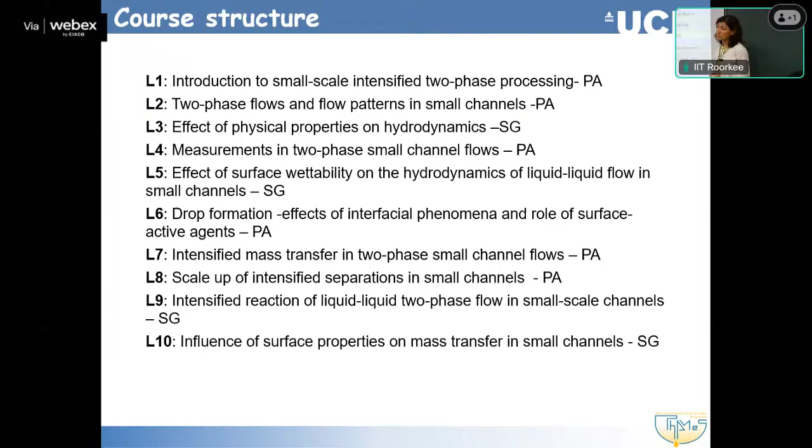So a few things before we continue and how these things were all brought together. I am from UCL. I don't know if people have been to the UK. UCL, I have a map as well, is located very centrally. It was founded in 1826, and in 2 years' time, we are going to have our 200 years anniversary. It was the first to admit students regardless of class, race, or religion.

In the old days, we had the big universities, Oxford, Cambridge, and some others in the north, that were all based on religious admissions. And it was the first to admit women students on equal terms with men. And it offered the systematic teaching of medicine, law, and engineering in England.

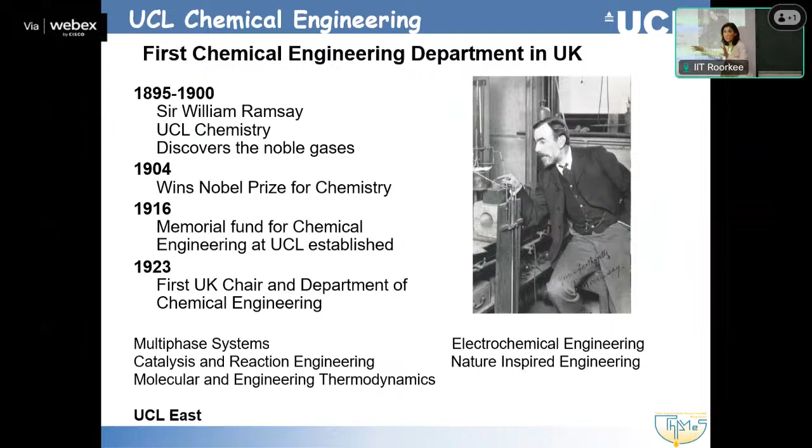So there was this memorial fund to create a chair of chemical engineering, but also a department later on of chemical engineering. And now in the department we have these research areas: multi-phase systems, catalysis and reaction engineering, molecular and engineering thermodynamics, electrochemical engineering that does a lot of work on fuel cells and batteries, and nature-inspired engineering. Multi-phase systems is where my research area belongs.

Just to give you an idea of the size of the department, we have about 555 undergraduate students, 122 MSc students, about 200 PhD students and research fellows, PDRAs. And at the moment, we have 33 academic staff and 18 lecturers teaching. So within this multi-phase research area, and now I'm coming more into what we are going to discuss today, is where my research group sits.

The work we do in my research group looks at different scales, traditionally starting from larger-scale two-phase flows, originating from the old energy, oil and gas applications, moving to medium and to small scale, which is linked to intensification. The connection between all these scales is the interfacial phenomena. We are studying mainly liquid-liquid flows, and the effect of the interfacial phenomena is very important. Small scales help us understand interactions, but can also be applied to large-scale flows.

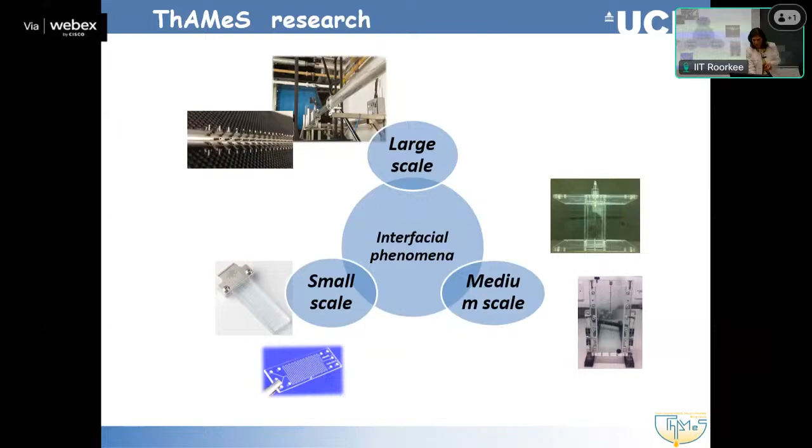So if I go now to my first lecture, it's called Introduction to Small-Scale Intensified Processing. And I decided to talk a little bit first about process intensification.

I don't know if I can move that. Yeah, I can put it here.

Hide it. Okay. Right. So why are we talking about process intensification in small scales? First of all, where did microscale come from? I have a little bit of a history here.

So in the late 60s, silicon wafers started developing, and not just that, but we started having the integration of sensors into wafers, and that created what we call microelectromechanical systems, the MEMS. These exist and are widely used today. We can find them in cars, in printers, in biomedical devices. The whole concept then continued into applications to chemistry.

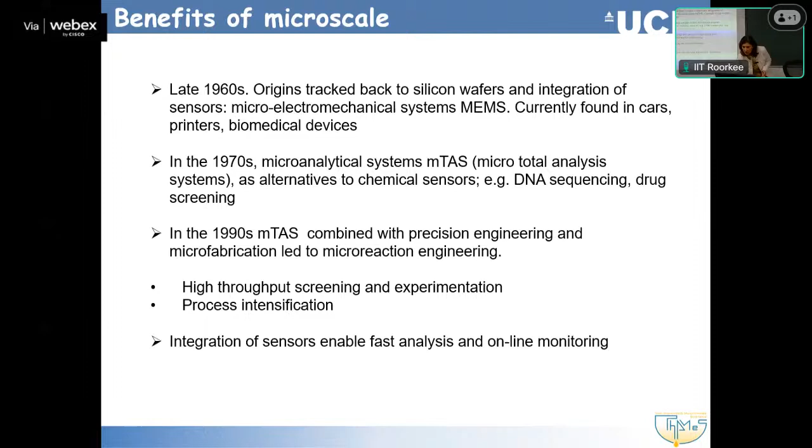So, let me see. What are the benefits? This was the history of these microscale applications, let's say. What are the benefits though? And I think if people have been working in this area, I don't know if I should try to have that a bit more interactive.

Why do we want, I don't know if anybody in the room, I know some people are working. What do you think are the benefits? Why do we want to do operations or processes in small scales? I have some here, but why did you decide to work with these small scales? Yeah. Probably efficiency is much better at that level. Yeah, efficiency is a step further. What is better efficiency?

Sorry? High surface volume ratio. High surface area to volume ratios? Anything else? Good, particles undergo the same kind of treatment. That's good, yeah. That's a nice one. Anybody else? All of the above. Okay, there are a lot of benefits.

We are working in small scales, so the fluid films are thin, which means heat and mass transfer rates will be faster. They don't have to go through a lot of fluid. The films are thin. There is a disadvantage on that. We can discuss that later. Thin fluid films, enhanced heat and mass transfer rates means that we reduce the concentration and temperature gradients. The conditions are more uniform.

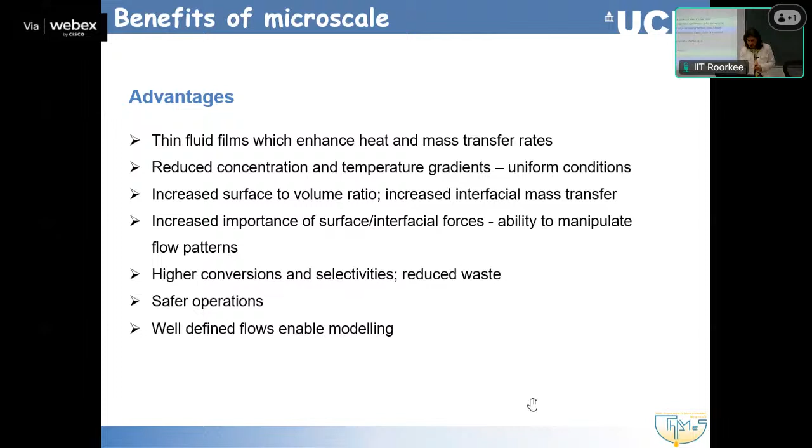Let me go now to this definition of microscale, with some equations. So what is small? We say micro, small channels, but what is actually small? It's a little bit of a vague concept. So the main way to check if a channel is small is to see if the surface tension forces dominate over the gravitational forces. That's the primary thing we would be looking at.

What does that mean? This means that this dimensionless number, which is the ratio of gravity or buoyancy forces over surface tension forces, has a small value. We want these forces to dominate over these. There are a couple of ways this dimensionless number appears in the literature. Bond number is quite common. Some people call it also Eötvös number. This is this ratio: we have gravity and we have surface tension or interfacial tension. If we talk about gas-liquid systems, it is surface tension; for liquid-liquid systems it is interfacial tension.

And now we have this number. The forces will be about equivalent if this is about 1. But when do we actually lose the significance of the gravity forces? There are various suggestions in the literature. And in all these things, I also give some journal references at the bottom. I believe you are going to have access to the slides in the end.

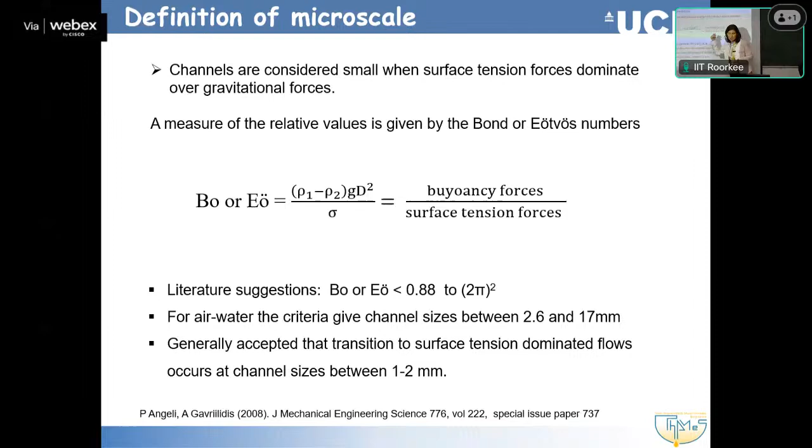We will talk about plug flow, Taylor flow in subsequent lectures. If people have worked with two-phase plug flows, Taylor flows, they will know that you can have a very nice, well-defined Taylor flow in channels of quite a large diameter, a few millimeters. What you start seeing from some point onwards is that some gravity is obvious. So you will see that the bubbles, the plugs, if it's gas or if it's liquid, will kind of sit closer to the bottom wall of the channel.

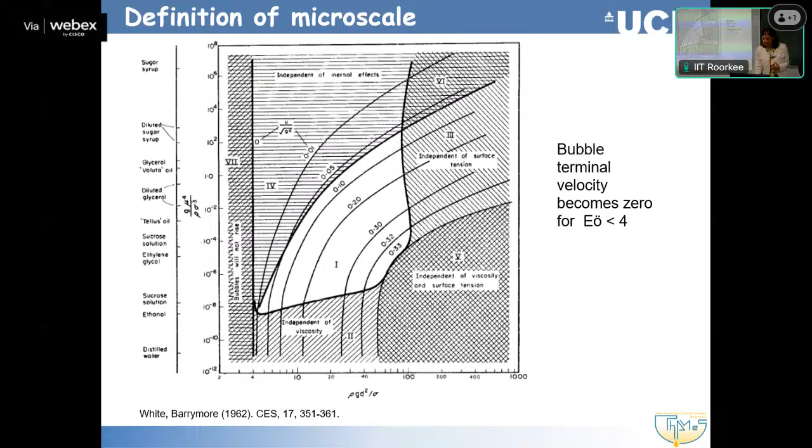One thing as well, we talked a bit about mixing, and I will mention it here. We said that mixing in small channels, because we only have laminar flows, is due to diffusion. And there is this Fourier number, if people remember reaction engineering, that is used to describe mixing efficiency. So we have a diffusion coefficient, the time that the contact is happening, and the characteristic length over which the diffusion takes place. If people use micro mixers, as we will see, this is one dimensionless number to check if good diffusive mixing will happen. So the Fourier number has to be between 0.1 and 1 to have good mixing.

So I will talk a little bit about mixing of single phase flows, and then we will be moving to two-phase flows. I mentioned the mixers, and I'm staying a little bit more on those, because having efficient mixing is where, in some of the references I will show you, there are industrial examples where people actually used micro-fabricated mixers, even in larger scale equipment, especially for gases. So they tried to improve the mixing by reducing the spaces, breaking the fluids down to improve the mixing efficiencies. But the rest of the equipment was proper large scale. So micro mixers were one of the earlier applications of micro engineering.

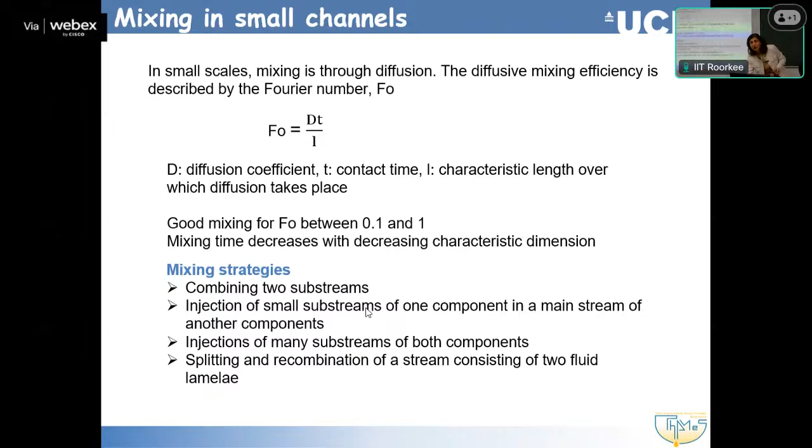There is a lot of that in the literature. And as I said, people have used those from the beginning to actually try to improve mixing. For example, this one is very good for mixing gases.

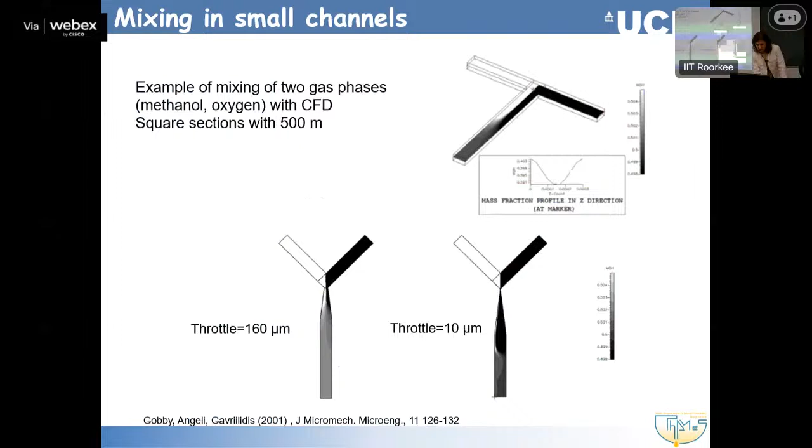I'm sorry, it doesn't go down like this.

Okay, so as I said, this is more of an introductory lecture, just some concepts of microengineering and intensified processing. I will mention a few things about gas-liquid. Most of the subsequent lectures will be on liquid-liquid. In gas-liquid, we have different contactor types, and people have worked a lot with film contactors, bubble or dispersed flow contactors, which are a little like the bubble column but with much smaller bubbles, or foam contactors. Taylor bubbles might be more familiar, because a lot of work has been done on that.

The film contactors are one of the earlier ideas, because they don't need a lot of microfabrication; it's like the chemical process falling films. But in that case, we use microstructured plates to have a thin liquid film over which a gas phase might flow. The same idea with this one, but here the two phases are separated by a mesh. So we avoid the mixing, we just let diffusion happen, which also makes it easier in the end to keep the two phases apart.

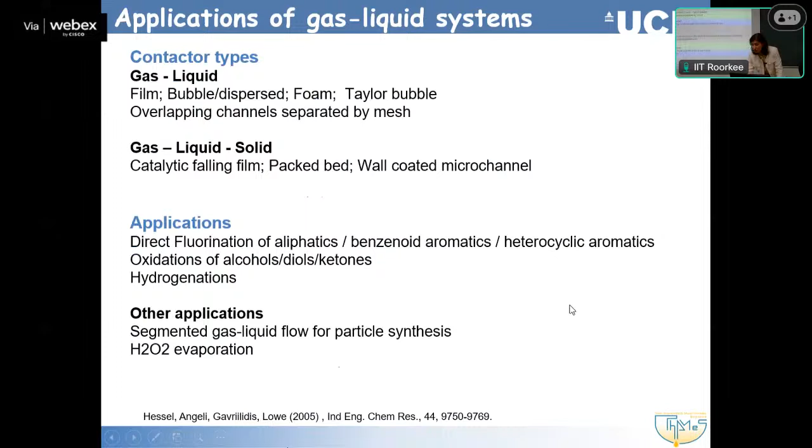So liquid-liquid systems, this is also where we have worked a lot more. One of the main applications is solvent extractions, and I will be showing you a lot more examples later on. Solvent extractions are used in a huge variety of industries, actually. Separation of biomolecules, there was a mention of that in the morning as well. Pharmaceuticals are using a lot of solvent extractions.

And there, not just there, it's also important to come up with solvents that are more benign, more environmentally friendly, let's say. So there is another area of research on how to develop the solvents for the solvent extractions. They're used a lot for separation of metals. And this is where we are now currently doing a lot of work in my group.

Critical metals, I don't know if you have come across them, and the whole problem with the critical metals. They're used a lot in all the renewables, of course, a lot in electronics, in magnets. And the problem is that if we go ahead with electrical cars, for example, or renewables like wind turbines, then we need to have a lot more of these metals. And of course, mining is one way of getting them. Mining can be challenging for the environment, but also it leads to depletion.

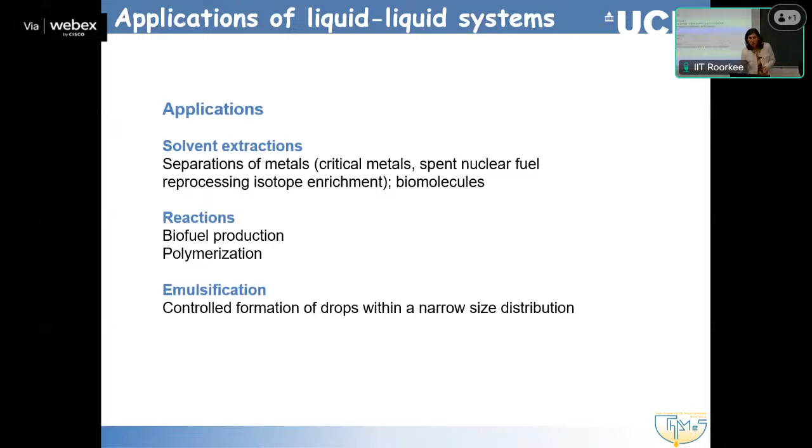So what is process intensification? It was a concept that has been introduced some time ago. One of the pioneers, Ramshaw from Newcastle in 1995, introduced it as proposing that it means a reduction in the size of the plant and size of your process. But nowadays, intensification is not just size, although with the microfabricated equipment, we do reduce the size. But at the same time, we do other phenomena. So process intensification can refer to equipment, so we do reduce the size,

but also the methods. How do we approach things? And the methods might be that we have multi-functional reactors. So reactors don't do one thing. You might have hybrid separations, where you combine a couple of different separations. Sometimes people, to drive a reaction, have the reaction and immediately remove one of the products, so it drives the reaction more. So this is about having hybrid, let's say, unit operations. Because of the microfabrication, we are able now to do it.

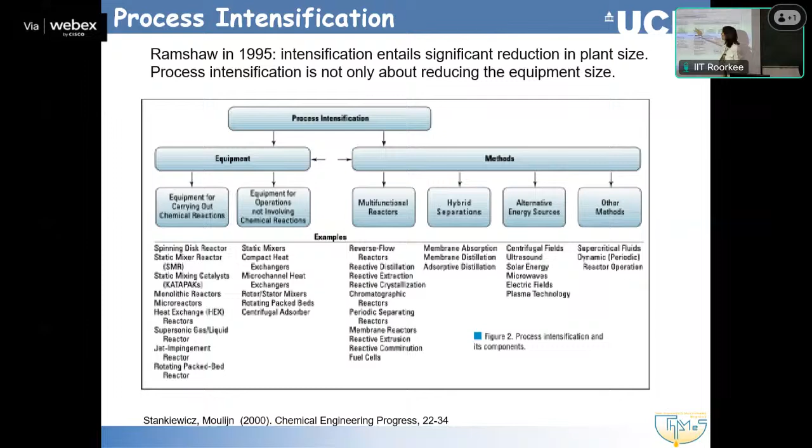We use alternative energy sources, which might be easier to do in small scales as well. So instead of just having the traditional mixing, we could use ultrasound, microwaves, electrical fields. Again, they can be used in larger scale equipment. They might intensify a process. A lot of them are easier to use in small microfabricated, precision engineered small scale equipment, or other methods like supercritical and some other green solvents. So process intensification is not just about size, it is about methods as well.

And I have this one as well, because it's a newer paper and it's a nice study. I have here a website also to have a look: these principles of process intensification. It's a series of books, or monographs, that have been updated. So again, we discussed in the very beginning why we want to do process intensification. It's much more nicely discussed here. We have to maximize the effectiveness of the molecular events. So we can alter the reaction rate by managing the frequency, energy, and timing of molecular collisions. When do we bring things in contact? We can do that in a more controlled way in a small scale.

This is something that people have been saying a lot. We give each molecule the uniform experience within our process unit, within our reactor. This is because we basically reduce differences. We reduce what we mentioned, the gradients, either of temperature or concentration. So all molecules actually experience the same. In a stirred vessel, we may not have that. Optimize driving forces and specific surface areas. The surface area is an example because we can have more specific interfacial areas, more surface area to volume ratio. And maximize synergistic effects, which again, as I mentioned, we might be able to combine the reaction with the separation because that drives the reaction. So this is a kind of interesting concept.

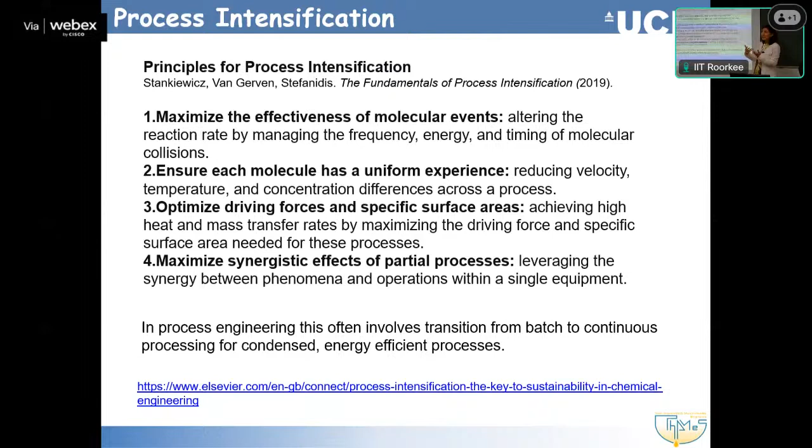And this is my last slide here, and I will stop. And this is what we will be discussing from now on. This is what I had for this first lecture, a bit of an introduction and some general concepts on why process intensification, small scales. We talked a bit about the mixing because this is something that even in large scale equipment, people might want to have intensified mixing. And where do we come across it?

So any questions? Any industrialization or commercialization of process intensification, or like